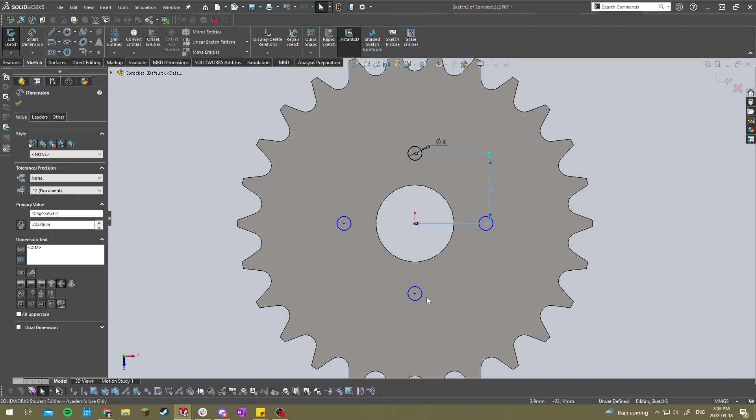So if you look at the sprocket here, there's four holes. We could check the dimensions of these holes here in this sketch. So each of them are 20 millimeters spaced from the center, so about 40 from both sides, and they all have a hole diameter of 4 millimeters. All right, and for the shaft here, we have the shaft diameter, which we could check in this sketch, so it's going to be 20 millimeters. So that means we need something that could hold a 20 millimeter shaft while mounting or screwing onto this sprocket.

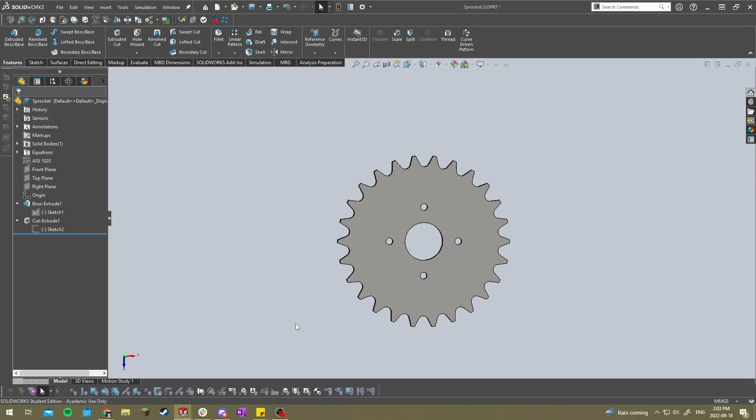So first things first, whenever you are designing something, the first thing you're gonna want to do is to do some research. So if I open up here, do some research and search up a sprocket mount. I like to just go on Google Images, take a look at the different options here. If you look at this sprocket, they already have specific mounts for specific shaft size. But this here would be kind of something that we would be designing.

So I like to use Google Images to get some inspiration, something like this, or on YouTube, there's quite a bit of stuff. I just recommend researching into the topic. Pictures are the best way to kind of have an understanding of the design, in my opinion. Once you have that done, I'd say start sketching out your design. So on my tablet here, I'll show you, I'll be just doing a rough sketch.

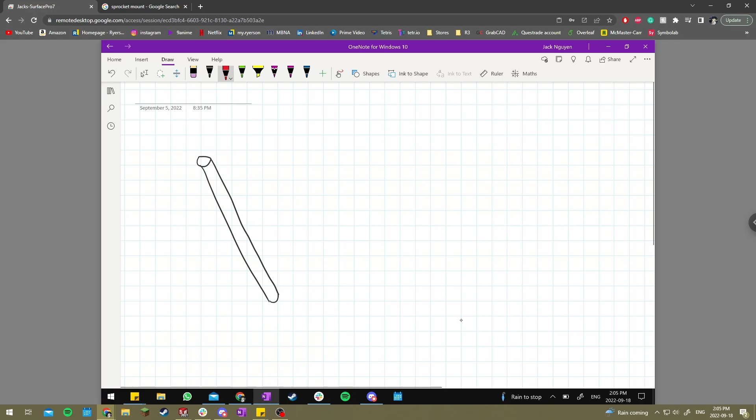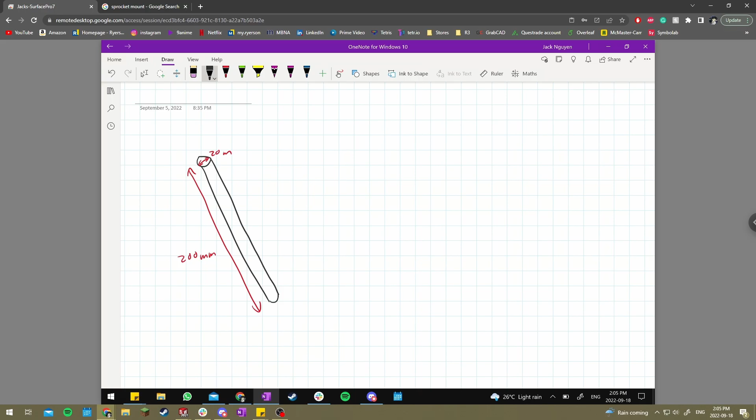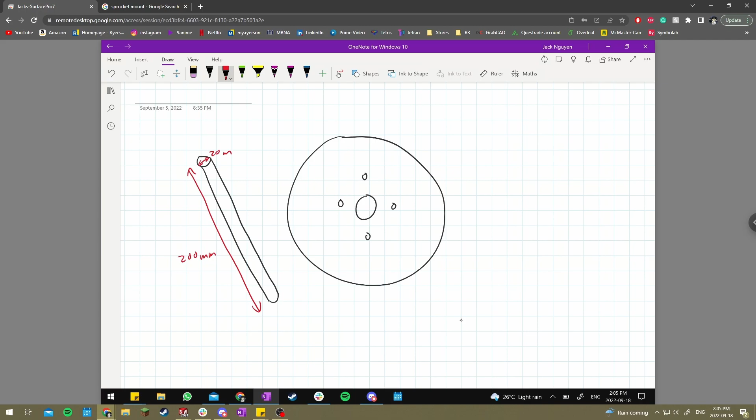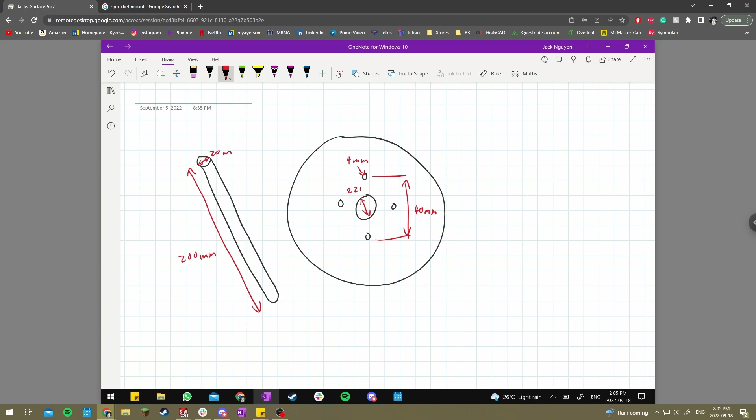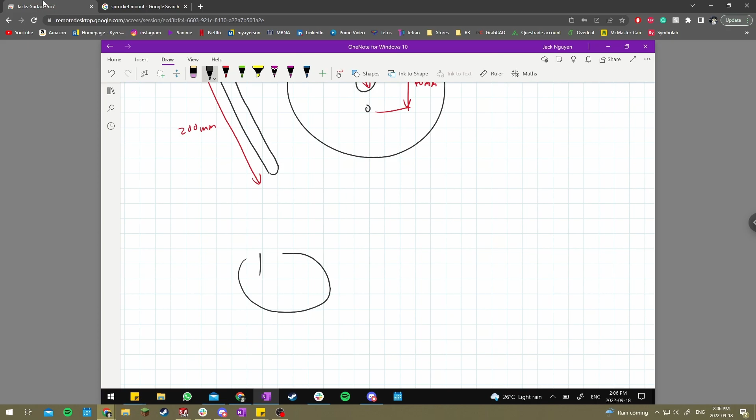Right, so now that we know that, if you go back to the Google image, like I said before, get some ideas on what you kind of want it to look like. In this case, I'm gonna go for a simple rotational mount system, so something like this. So I guess I'll start with sketching out the design that I will want to make. So it's kind of like a cylinder with a flat plate connected to it. All right.

And I would highly recommend sketching the design out first before actually CADing it. It just helps with saving time, but it honestly depends on what you're doing. Most cases, you'll have to sketch something out as a preliminary concept so that you know what you're going to be making, what it's going to look like, and for other people to kind of have a sense of what you're going to make.

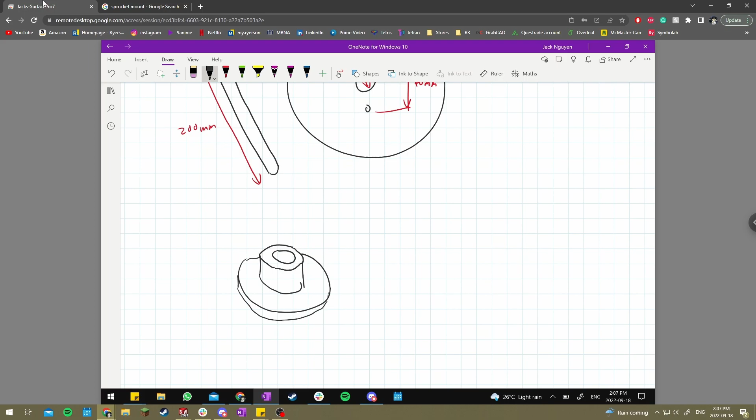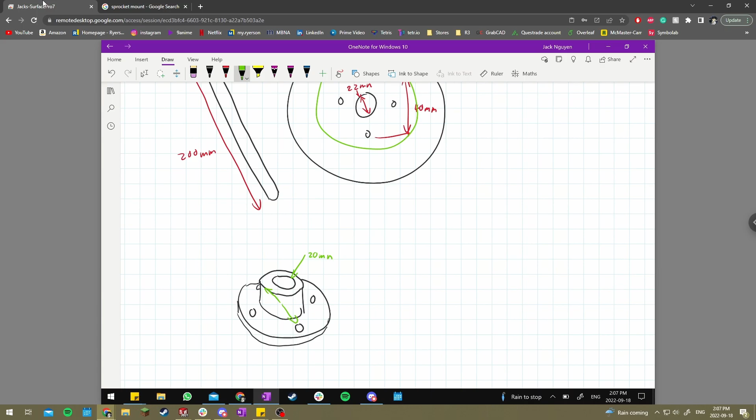All right, so a plate like this, we would need four holes on either side to mount onto these ones here, right? And then the shaft would go into this hole here, so the shaft diameter. So this would have to be roughly 20 millimeters. These holes would all need to be spaced 40 millimeters apart from each other. This is 4 millimeter diameter.

So couple means it's basically fixing one part to another one, so fixing the rotational parts together. And this set screw lets you kind of combine the two parts together so that when one moves, the other one moves, and it doesn't skip. So the actual collar or whatever is being connected doesn't rotate independently from the actual shaft.

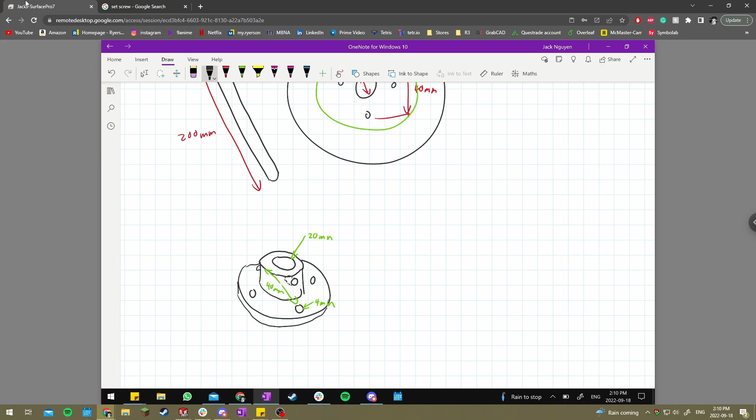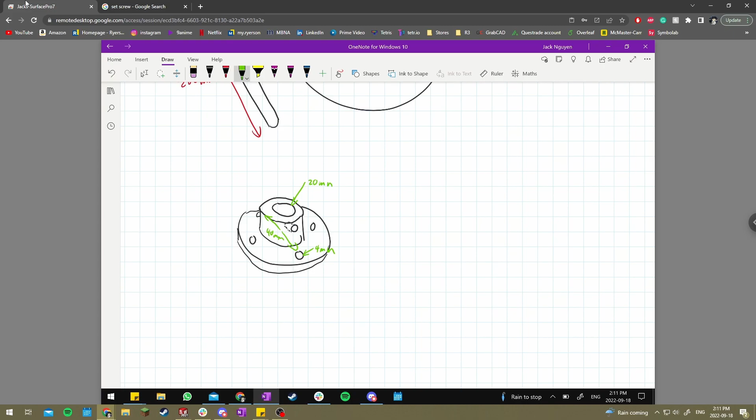So if you go into your drawing, basically I'm just going to add a hole that goes straight through to the other side of my shaft collar. In this case, I'm not going to draw the back part just so it's not confusing, but it'd be something like this. In this case, I could choose a size for this. When we're designing stuff for the team, we usually use metric fasteners. So the holes in this case are 4 millimeters, which stand for M4 screws.

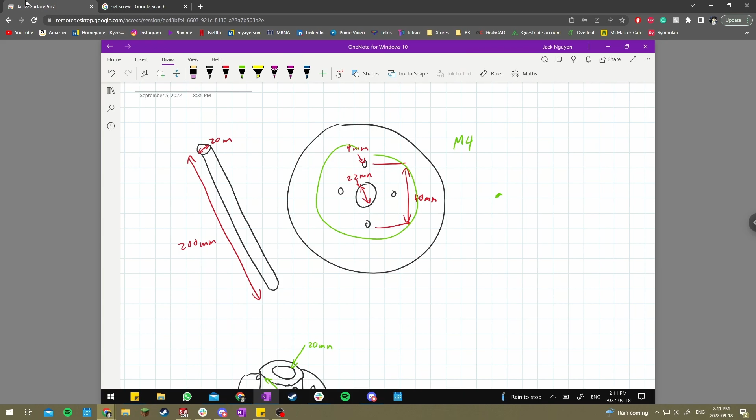With metric systems, it's really simple, mainly because the sizing starts with the M, and then the millimeter dimension would just be written here. So M4 is 4 millimeters, M6 is 6, and so on. In this case, M4 is pretty small, so I'm just gonna make these a little bit bigger. I'm gonna make them 6 millimeters. You can keep changing this until you see what works best. 6 millimeters should be fine for this, so I'll set it to 6.

Last thing we need to do is actually figure out the sizing of our part here. So what do we want this huge base dimension to be? What do we want the length to be? And we'll figure that out now. Most of it is trial and error, what you see is best. The way I design for it is depending on the material or manufacturability. So it depends on what we're gonna be making it out of.

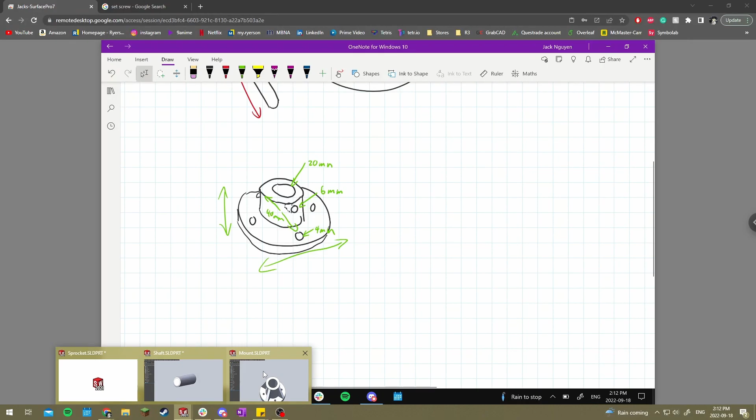If it's a 3D printed part, you might have to make it bigger just because it can't take as much force, and it's not as durable as something like aluminum or metal. So if we were to make it out of some type of metal, we can slim it down a little bit compared to what a 3D printed part would be. In this case, I already pre-designed the part just to make sure it works, and I believe, let me check the dimensions here.

So I have it set to 55 millimeter diameter and 25 millimeter height. Right. So 55 millimeter diameter. In SolidWorks, the diameter symbol is that, so it just helps us figure out what we're actually looking at. If you haven't learned this already, you'll see this symbol in the Mech 222 course.

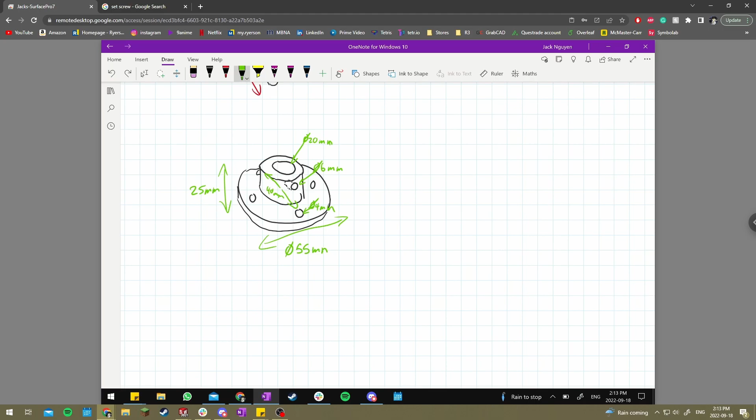All right, and then the last thing we really need is the height from here to here. We could do that when actually designing the part, so I won't figure that out now. And the actual width of here to here, you'd figure out too. I'm gonna make it consistent, so I set it to 5 mm width. So that's the width of the part.

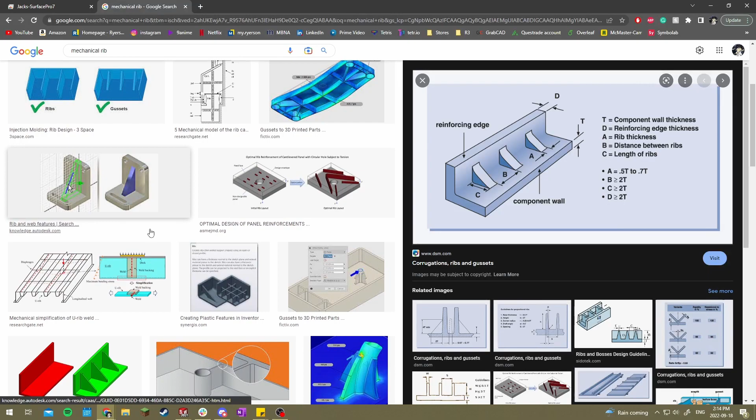And one final component, or at least feature, that I added to the design was ribs. So ribs are kind of a structural component. So if I search it up here, it's just to prevent stuff from breaking. So if you see here, it's basically a reinforcement beam that you add onto designs. So in this L bracket here, since it's shaped as an L, it does tend to kind of bend a bit, but adding a rib feature basically prevents it from bending.

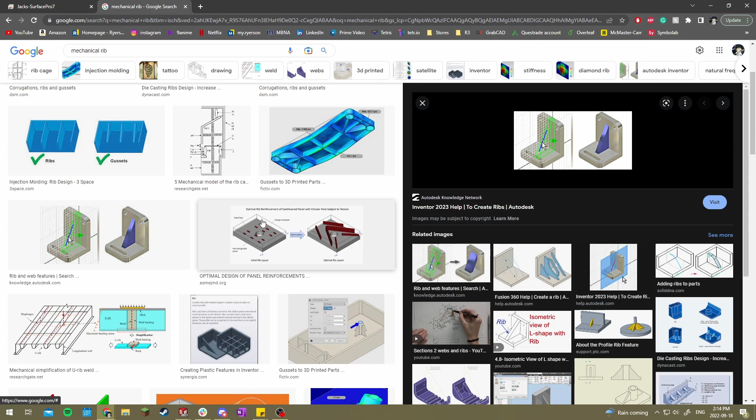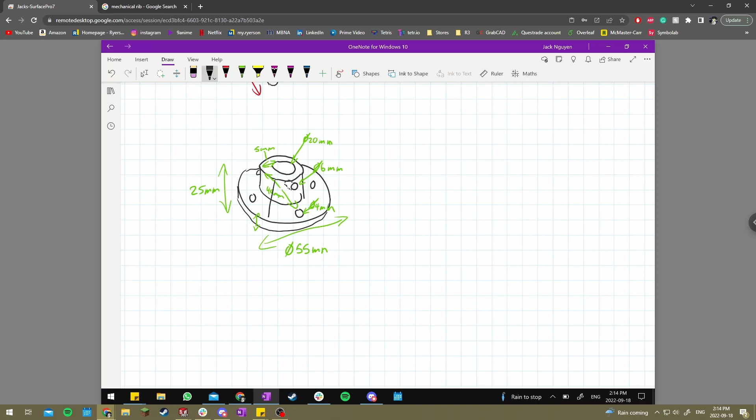With our piece here, since it's a plate on a cylinder, if it does have any bending motion of any sort, it can also snap. So I just added it for added safety. In this case, if you were to make this part, you probably won't need it. It's just nice to have. So ribs would be something like that.

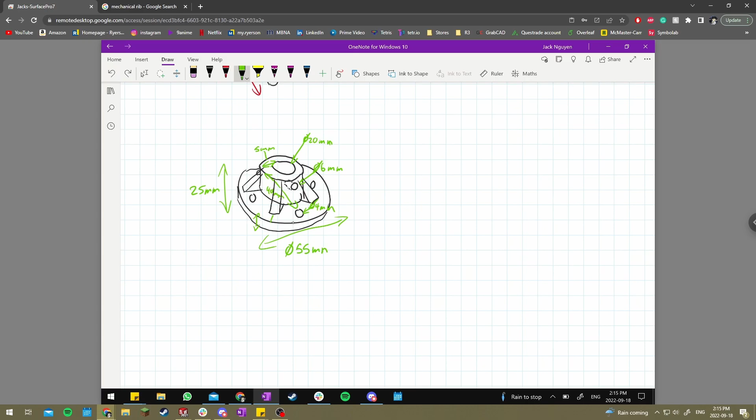And with SolidWorks, making ribs is a little bit finicky, so I can't make them fully flush with the edge. So I have the spacing from the edges to be 0.5 mm, so as close as possible. That's how I figured out the dimension. So now with the sketch here, we could start designing the actual part. So I'll head back into SolidWorks, start a part, open up a custom template that I made, and we can start making the part.

So if you look at the part, there's different methods of starting the actual design. You could start by making one flat extrude for the plate, and then a second extrude for the cylinder, and then make all four ribs, something like that. Do all the cutouts.

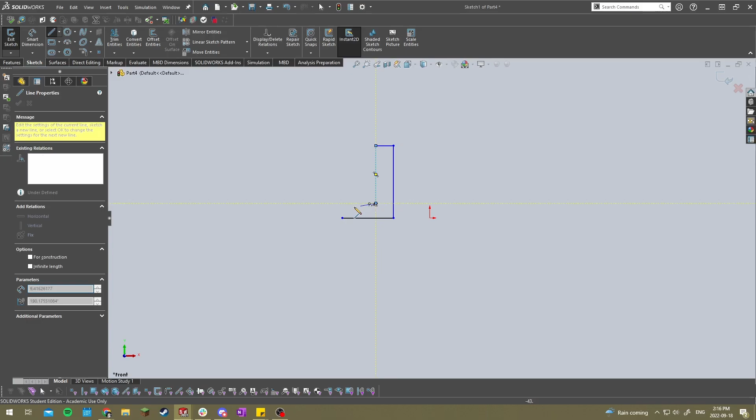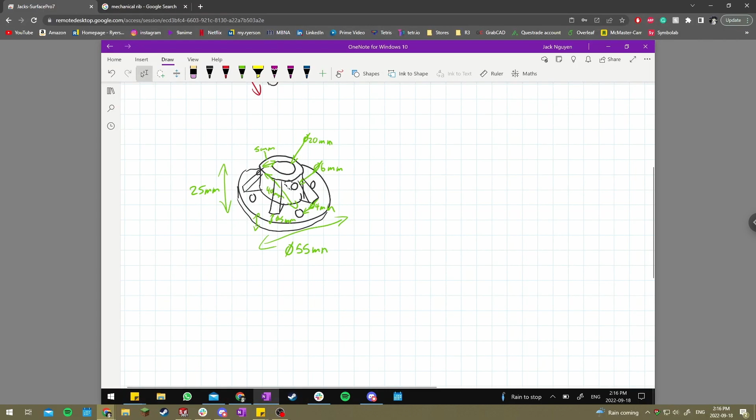It's different methods, but when you're designing, you want to design it as quick as possible, so the least amount of features. In this case, I start with a revolve sketch to make the plate and cylinder. So I start with the L shape here, set the dimensions so we know the inner diameter is going to be 20 here. And in this case, I set it to 10 since it's going to be a revolve about the origin. So it'd be 20 total.

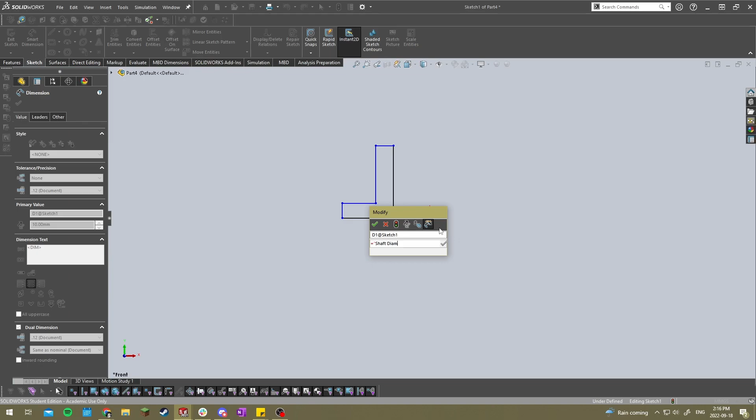So if I select that again, set it to 10. In SolidWorks, you could also add equations by changing the name. So I could do shaft diameter, write that out, and then set the dimension. And if I want to reuse that dimension there, I could just put a dimension, make it equal to shaft, or go global variable, and you could choose shaft diameter and just refer to it later on. It's a little handy, very useful.

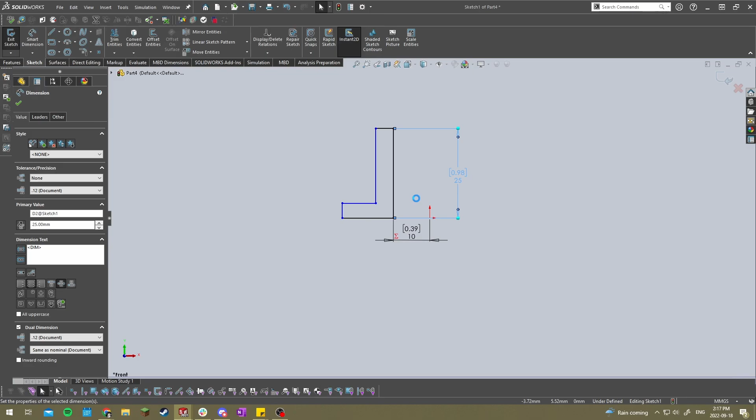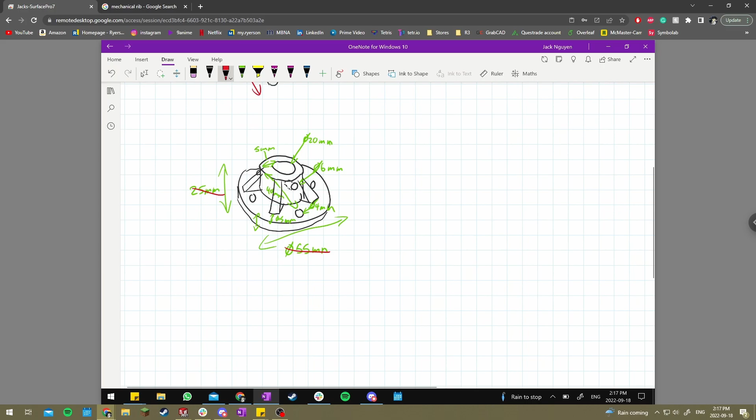This is 25. From here to here, it's going to be 55 divided by 2. There's also ways that let you put equations into SolidWorks and it will just equate the dimensions for you. So save you some time so you don't have to do the math in your head. So we have 55 down, 25 down. You can start striking them if that helps you. I'm going to do that here.

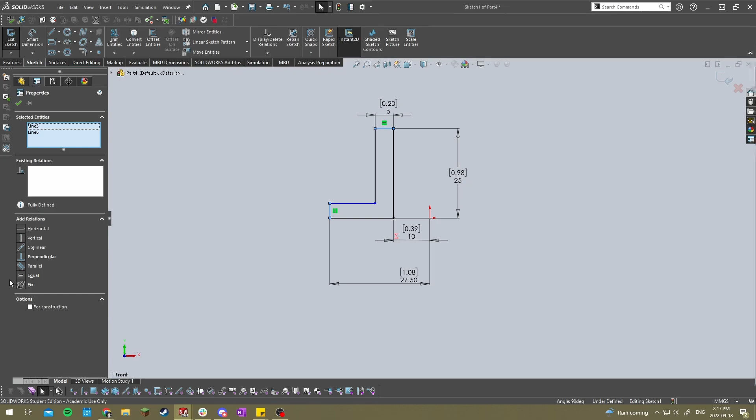All right. We also have the thickness of the part. I set that to 5. In this case, since we know both of the thicknesses are the same, I could also use a relation here. So if I click this, hold control, click this, I could add a relation, make them equal. So now both of those are equal, and we pretty much have most of the dimensions down already. So we have four down. We have four more left, so halfway done the part already.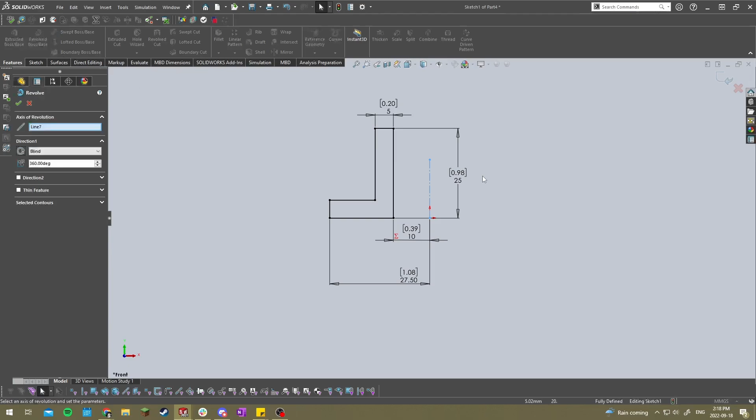With the revolve tool, you have to remember to add a line or an axis for the actual part to revolve around. So I just added a center line here. Click revolve boss base. It will automatically select the last line you created, so this line here, and make the revolve. So you see I made the first main part here using just a revolve tool. Next thing we'll do is make the holes in the plate. So these four holes here.

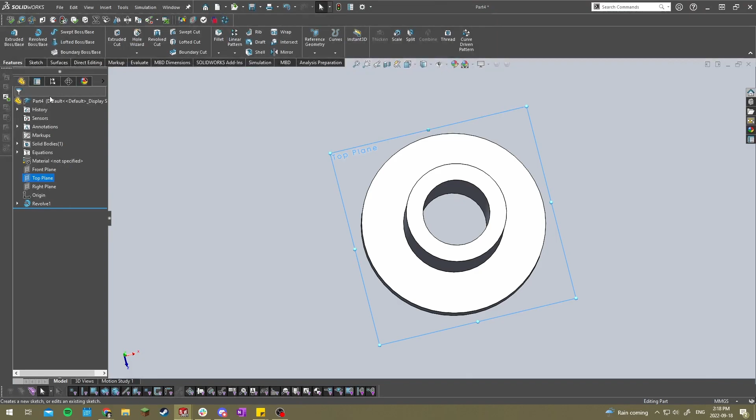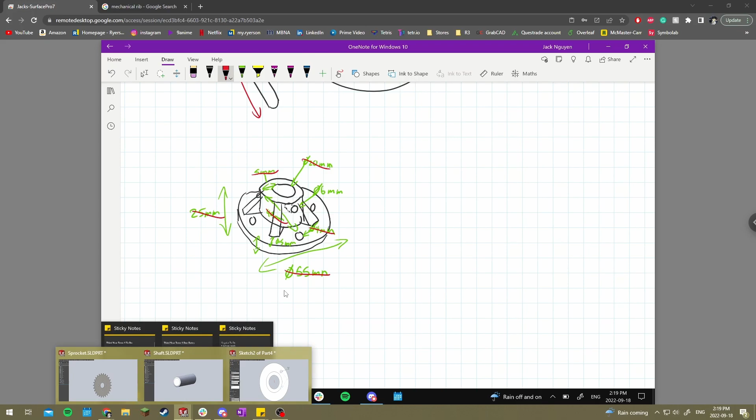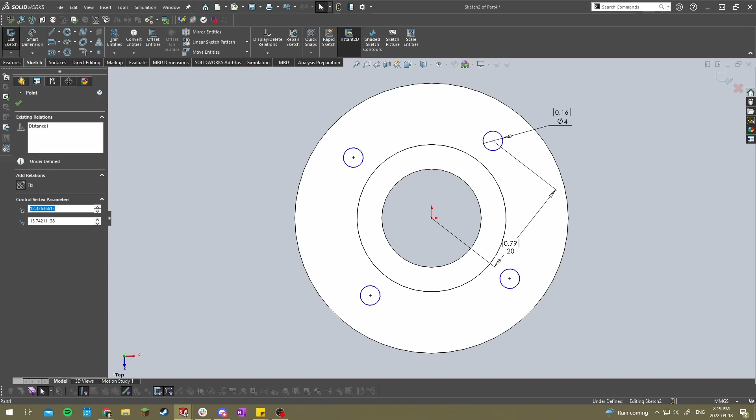Alright, so if you see here, I could still move it. That's just because this origin hasn't been set. Set that there, and in this case I want to still fix it since I can still rotate it. So what I'll do is I'll select this point here, select this circle here, and choose horizontal, so it will make the two origins horizontally straight with each other, as you can see with this line.

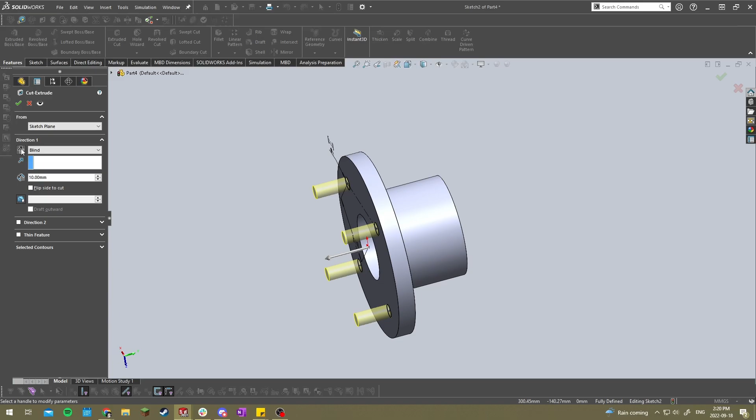Now you could choose the extrude cut tool and cut these holes. If you see it automatically goes in the opposite direction, you would choose this here, click on that button, and then it'll flip it. If you know the depth of the part, you could set it here, or you could just choose up to next, and it will only extrude up to the next face that it sees. And we have the holes for the sprocket.

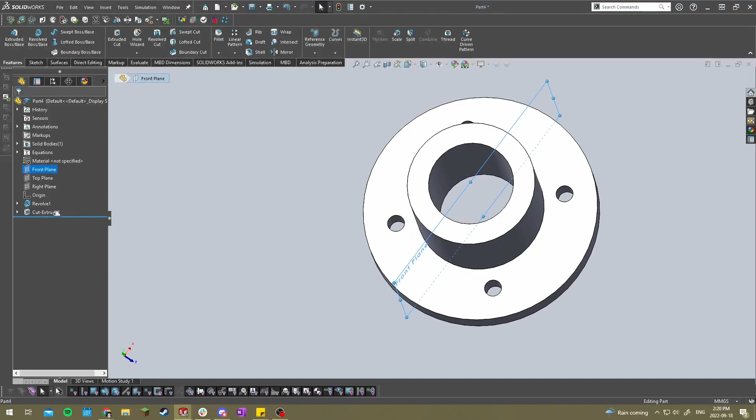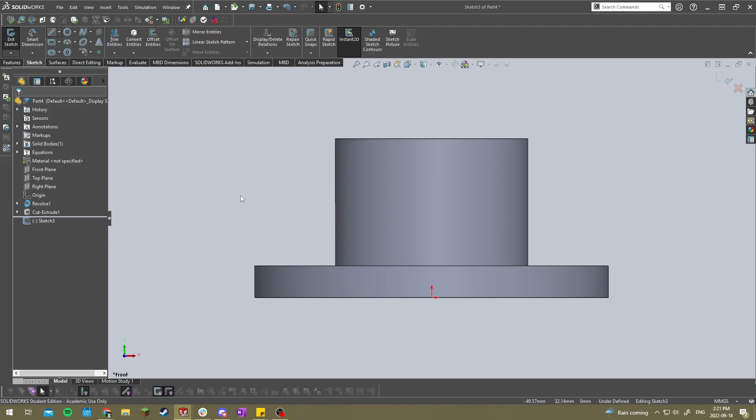Next, we want that hole that goes, the set screw hole. So actually, we'll add the rib first. So for the ribs, you would choose a plane that goes through the side of the revolve here. So in this case, not the top plane, since that's parallel with the bottom part, which is either the front or the right. I'll choose the front in this case. It doesn't matter too much. And then it's pretty simple with the rib tool. You just draw a line from one face to the other face.

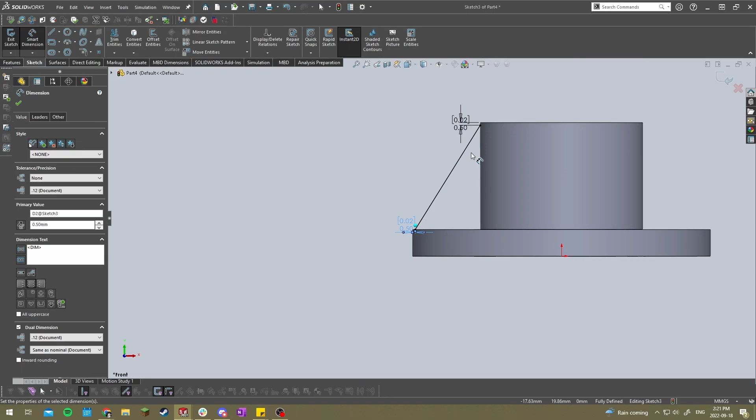I also dimensioned them to be 0.5 away from the face. So 0.5 there, 0.5, so 0.5 millimeters from the edge. And if you go in the image, you can delete that off. So 0.5 is good.

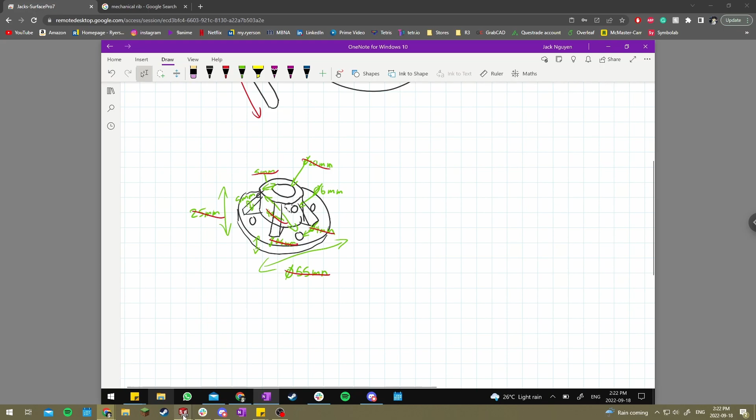And then now all you do is you go to features, click on rib, set the width of the rib. So that's something that I didn't put down here, but in this case we want these to be about 5 millimeter width. So 5 millimeters. This case set to 5, and then it automatically chose both sides because you want it to be even. And then you have to make sure this arrow is pointing downwards and not upwards. You could switch that here by clicking flip material side.

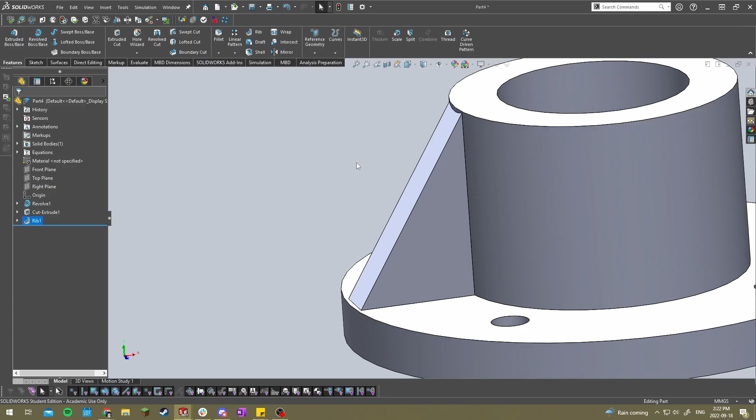Click the check mark, and it creates a rib here for you. You could repeat that again for all four, or you could just use the circular pattern tool. So select circular pattern while having the rib feature selected. So I'll show you that again. My rib feature is selected, and then circular pattern. It will automatically put in features and faces here.

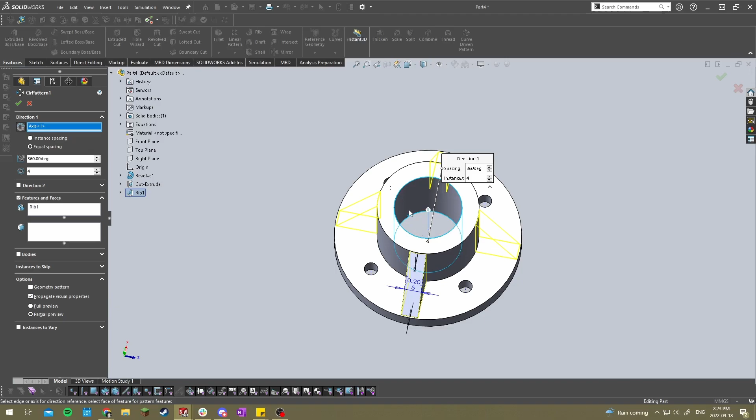And then now for the direction. So in this case, it wants an axis for it to revolve around. We didn't draw any in this case, but we had one previously when we did the revolve tool. So you could go onto your show item tab, click on the drop bar, and choose view temporary axes. And you would choose this temporary one, which was the one you made previously for this revolve. Click check, and it adds those ribs in for you.

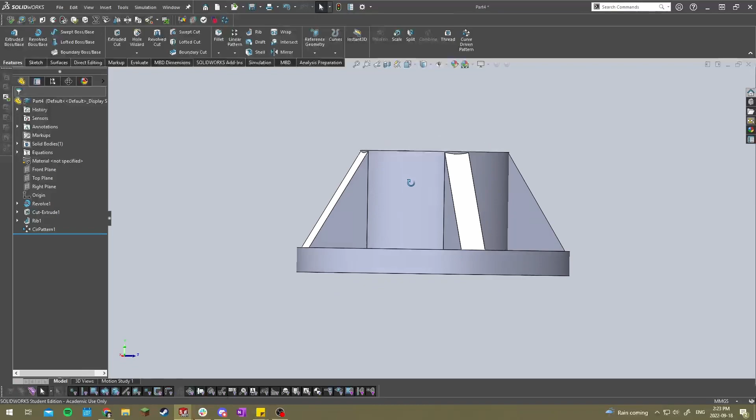Now the final piece is to add that hole for the set screw. In this case, I'm gonna make the hole through all so that you could add two set screws, and you can't really add it here. You would have to add it on this side, which is parallel to these holes. If you look at your planes, you don't have any planes that are like that, so you would need to actually create your own plane.

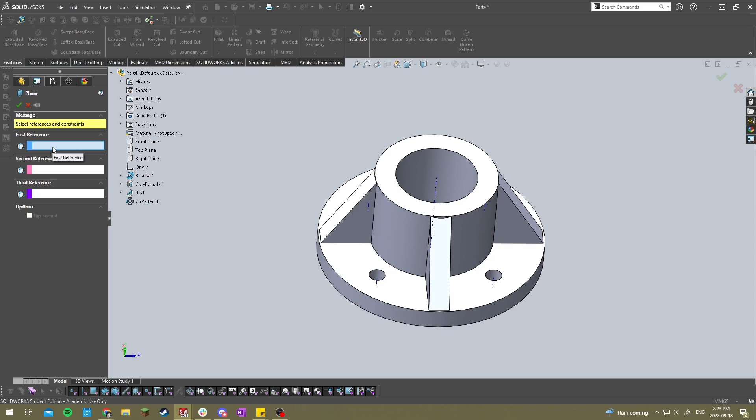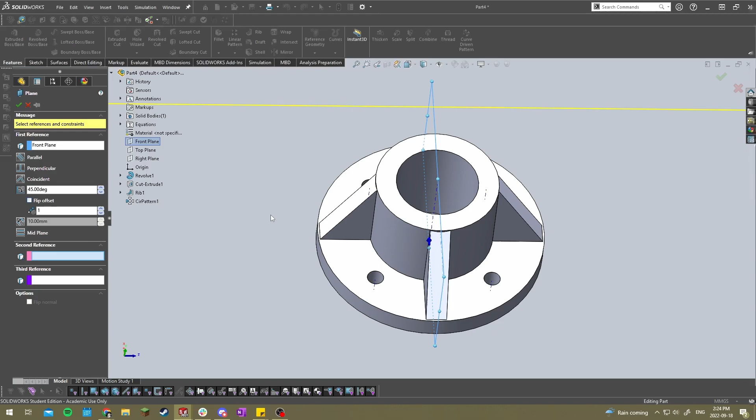So if you go to reference geometry, select planes, it requires you to choose different references. In this case, we only need two. At least the plane tool requires you to have two minimum. So the first one will be the front plane, and then I want it to be 45 degrees from the front plane. So I'll choose this tool here, at angle, set to 45, and then the second reference would be where you want it to rotate about. So I'll rotate it about that temporary axis that I created before, and choose that there. Click yes, and now we have a plane that's 45 degrees from the front plane.

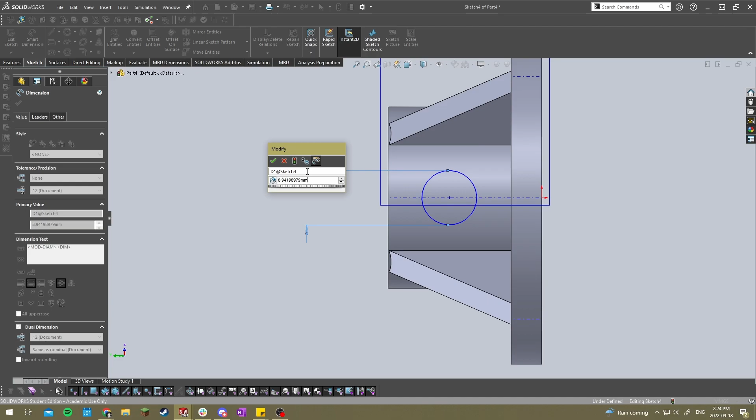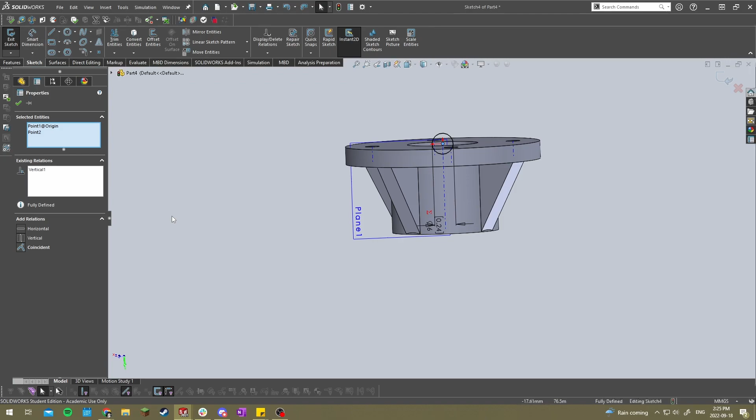You could select this plane, click sketch, and now make a sketch of the circle cutout that you needed for the set screw. In this case, we said the diameter was going to be 6, so I could also name this to be M6 if we do want to refer to it again. So 6 millimeters. I want it to be aligned with this here, so I'll choose those two and then click, where is it? Click that and click horizontal. And so now it's horizontally fixed.

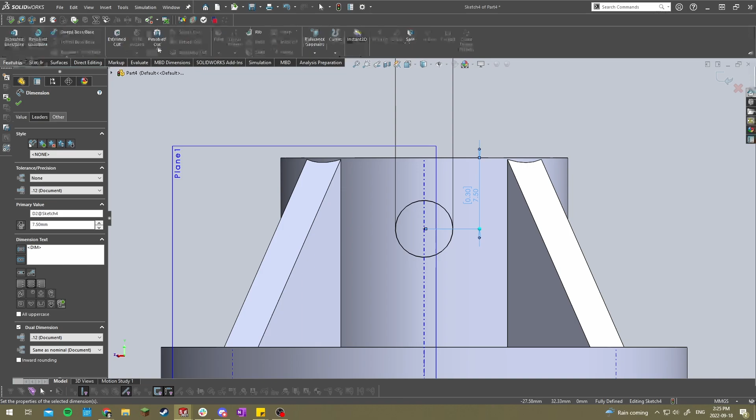And then I also have to choose the height for it. So for the height, I'll click on Smart Dimension, go here to here, and in this case, I'm just going to choose an arbitrary number of 7.5 millimeters, to extrude cut through both, so on both sides. Click yes, and in this case, it looks pretty good. Doesn't look like it will interfere with a bolt head if it were to be screwed here. So overall, this is a pretty decent height, and I'll just set it as that. You could hide the plane by right clicking and clicking the eyeball. And now we have the finished part here.

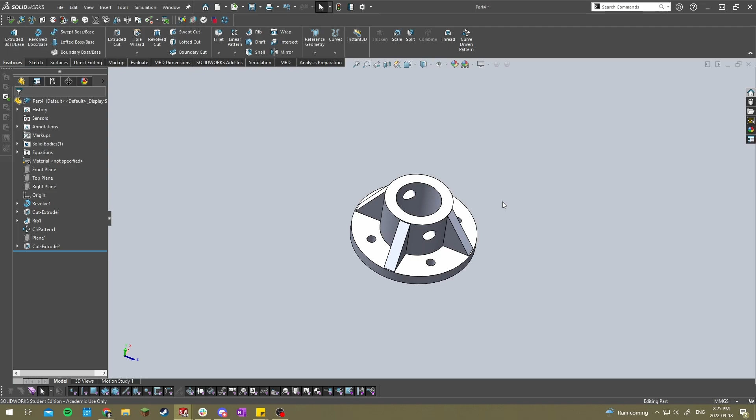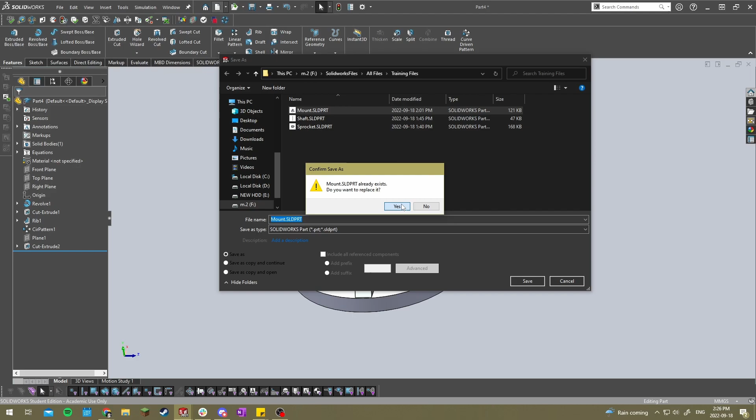So to finish it off, we'll put this in an assembly to confirm that everything we made works. So you can click on file, click on make assembly from part, or you could click on the drop down here, do the same thing. Save the part first. In this case, I already made it previously, so I'll just replace my previous edition. And then select all of the components that you want. And if we made this correctly, everything should fit. Make sure that everything's floating.

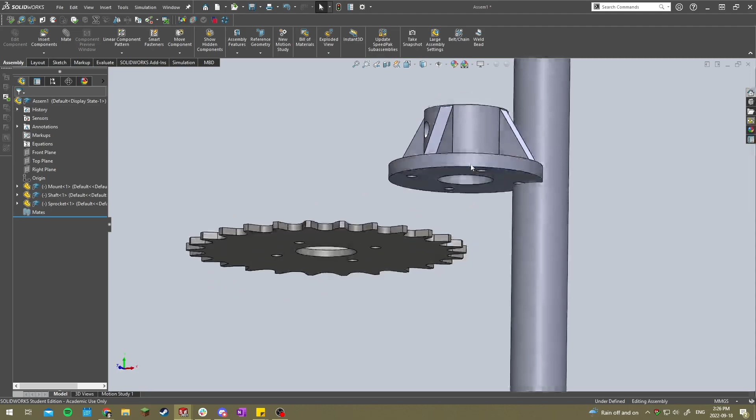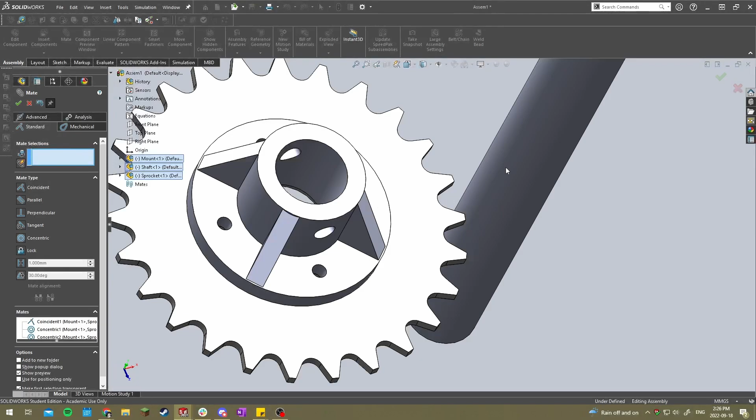So I'll start with mating this onto here. For this plate here, you only need 3 mates total for it to be fully fixed together. So they're fully fixed together. And then for the shaft, you only need 2 since a concentric counts as 1. Now if you see, this sprocket has been fully fixed to the shaft just by the mates.

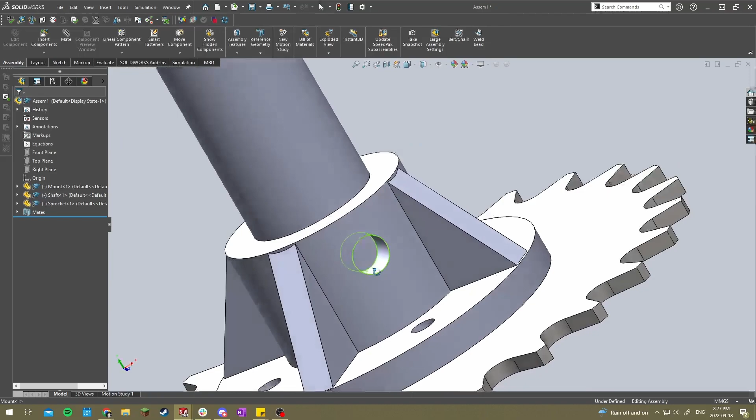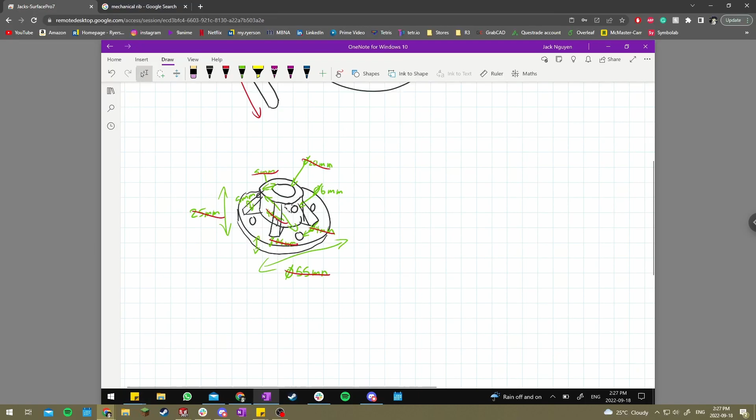And in the real world, you would also add the fasteners that you're using, so bolts, nuts, set screws. You would dimension the specific holes to fit a thread if you did need it to be threaded. So in this case, the set screw hole would be threaded, and you would probably use a thread feature to add that here. In this case, we aren't, just for the sake of time.

And then same thing here, if these sprockets are threaded, you gotta make sure that there's enough spacing in this hole so that the bolt could just run through. And that's something called tolerance. I didn't show you that today, but you'll be learning that in a future course, so you won't have to worry about it in this case.